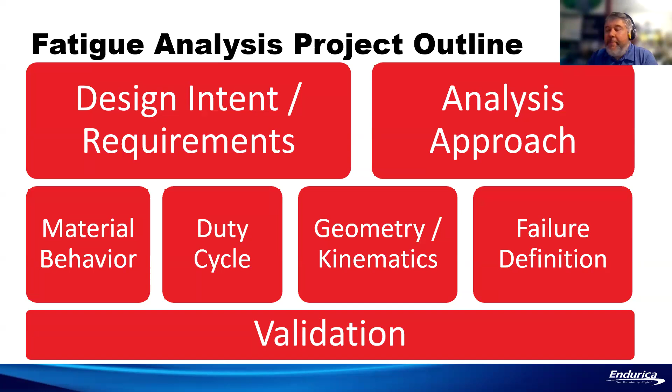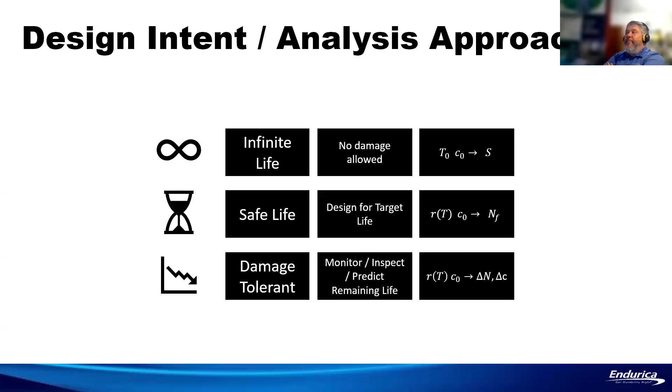All right, so let's talk about some broad categories of fatigue analysis, and the Endurica toolset supports all of these. These are ordered from, let's say, the easiest and least expensive, least time consuming to the more sophisticated analysis. So the three categories are infinite life, safe life, and damage tolerant analysis. And now in the infinite life approach, what we do is we say, when I design this part, we're going to select our loads or our properties or our part dimensions such that damage will not be allowed to occur.

Just like metals, rubber does have a fatigue limit, and if you stay below that limit, then in a limited sense you can predict indefinite life, right? So the idea in infinite life analysis is you're just checking, let's say for your worst load case, are you above or below the fatigue limit? And when you use the infinite life approach, you can calculate what I've called S here, the safety factor, and that just represents the margin by which you are clear of the fatigue limit, right? If you're right on the fatigue limit, then the safety factor is 1. But if you're below the fatigue limit by 2, then your safety factor is 2. Okay, so that's the infinite life approach.

The next category is safe life, and in the safe life approach, your customer gives you a target life, right? An automaker might say, well, you have to have a 100,000 kilometer warranty for the car or something like that, and so you're given a life target. Now this requires a bit more testing because you have to characterize the rate at which damage develops as a function of your input loads. But once we make that characterization, then we can calculate life and we can check whether we're above or below the limit. That's the safe life approach.

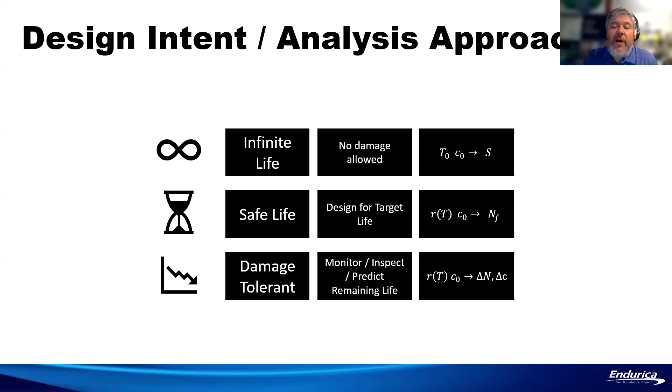So Endurica has tools for all these, and we're going to talk through those today. Now, I mentioned that when you do fatigue analysis, one of the very first things you need to think about is materials testing. Of course, Endurica does have a materials database, but in general, to get the best results, you're probably going to want to test your rubber material. At least, well, like I say, again, it's a question of scope.

So, if this is a context where you don't have the luxury of testing, you can use the Endurica materials database that's included with the software, and that's maybe the cheapest option. But our materials testing framework is scalable, and you can bring in as many of these various effects as you need to capture as much accuracy as you can within your time and engineering budget.

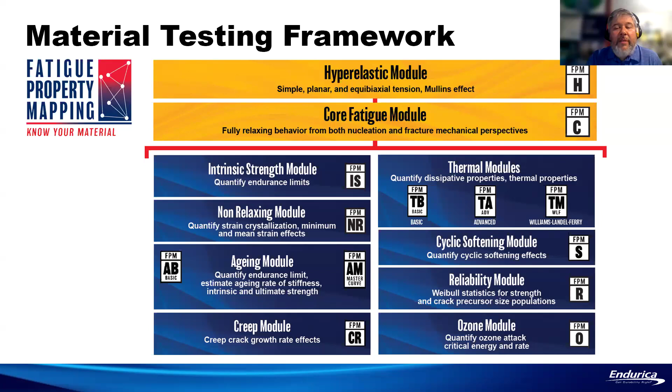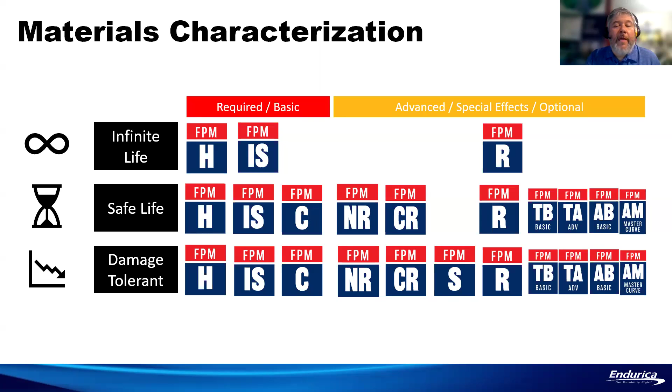Now, when you use Endurica, there are three tools that we talk about. One is Endurica CL, and we have Endurica DT, and we have Endurica EIE. They're really divided by the kind of workflow that they support. So with Endurica CL, it's a post-process only workflow where you run your finite element model, you run Endurica CL as a post-process on the stress strain results from the finite element model, and then it outputs either safety factor or fatigue life. So the key thing there is it's a single duty cycle, and you're talking about repeats or safety factor.

And so you can see this maps onto the first two categories, right? This maps onto infinite life or safe life analysis. Endurica DT is our incremental solver. With Endurica DT, you can specify block cycle schedules. You can do co-simulation. With DT, it's not necessarily purely a post-process. You can couple the Endurica solver with your finite element solver. And for example, if you have cyclic softening, you can update the stiffness with cycles, like if you have a stiffness loss type of failure mode.

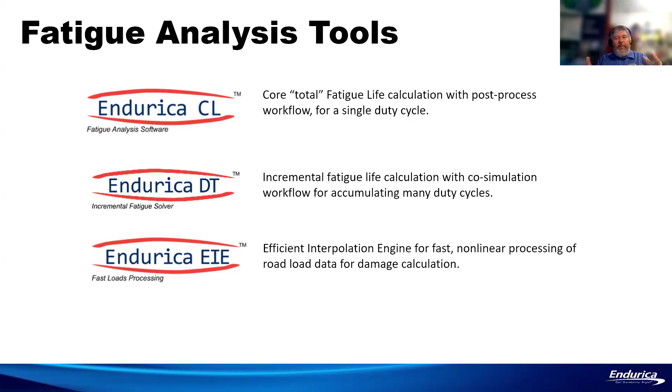In many cases, the histories that you want to analyze are lengthier than you can really analyze directly with a finite element simulation. And so Endurica EIE provides a method whereby you can rapidly convert XYZ global force or displacement inputs into stress strain history on each element in a model without having to do the full-blown FEA. It's very fast. It's like 10,000 times faster than trying to directly do it. So it opens up a lot of analysis possibilities that are important.

All right. So now what I want to do is just go through some examples to make all these ideas concrete. And you can see that as we're going through these examples, we're scaling up both the materials testing and the analysis requirements. So the first example that we're going to do is just an infinite life analysis. Again, the right context for this is when you have maybe a very tight deadline or a very small budget to work with. This is just a way of checking, is it above or below the fatigue limit? If it's below the fatigue limit, then you've got a reason to say that you've satisfied the design requirement.

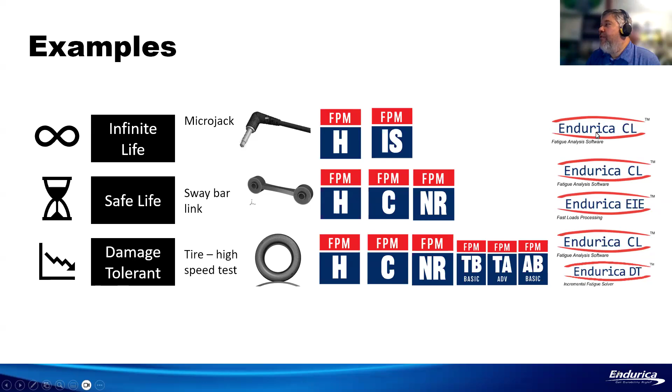So Microjack is one example. We'll also do the example from an automotive suspension, a sway bar link. And then we'll also do a tire example. You can see here that as we go in, the materials characterization gets more and more sophisticated. And you can also see the tools that we're applying in each of these particular examples. So, all right, let's talk about the first example.

If you decrease the tearing energy input, the rate of crack growth gets slower and slower and slower. Eventually, as you reach this limit T naught, the crack growth rate will actually drop to zero. For a natural rubber, for example, T naught has a value of something like maybe 50 joule per meter squared. And if you're below that, then the crack does not have enough energy to break any polymer chains, and so it doesn't grow no matter how many cycles you give it.

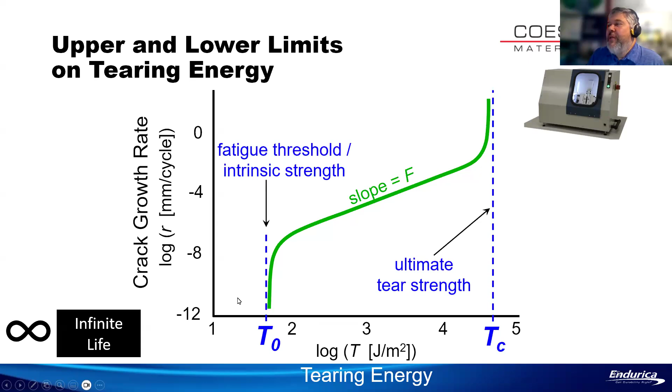This is for an EPDM compound, and we've measured the fatigue threshold at 60 joule per meter squared. We've measured the initial crack size at a tenth of a millimeter. And I should mention, when you're using Endurica, it always assumes that your material contains microscopic cracks. And one of the important inputs for the material characterization is, what is the initial size of those cracks?

We can measure that experimentally, or you can make an assumption about that. Typically, they're in the range from 20 to 100 microns. So you can see in this case, we've used a sort of conservative assumption of a tenth of a millimeter.

But again, very simple characterization, and that's an advantage, because if I just specify my hyperelastic and my intrinsic strength properties, I don't really need to worry about a lot of the other special effects that rubber might exhibit. Temperature and rate dependency, I don't have to think too much about that. Crack growth rate curves, strain crystallization, all of that I can just kind of ignore, because that's not going to come into play in this analysis.

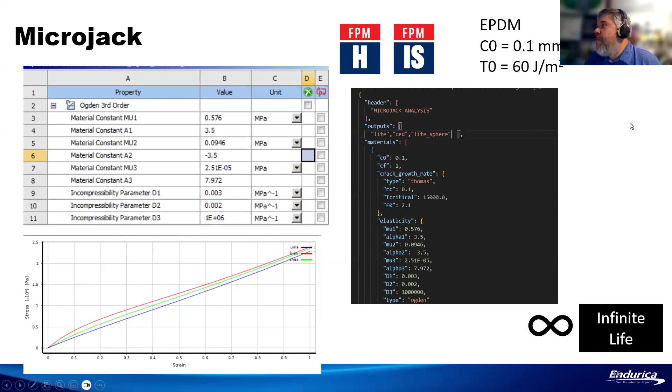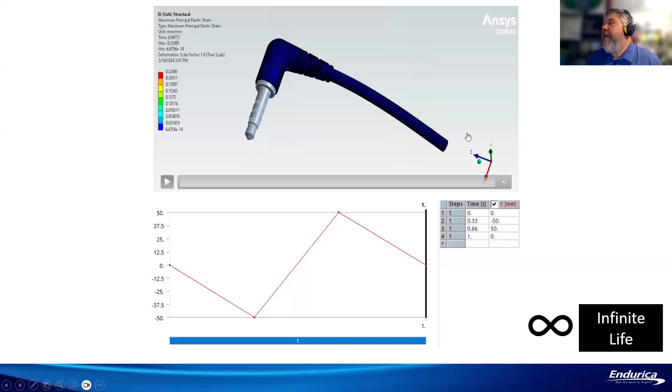So here's an example for this micro jack. We just want to apply this displacement where we're sort of flexing the connector here, and hopefully we want to show that the design is going to have an infinite life capacity. So first you run the simulation in ANSYS,

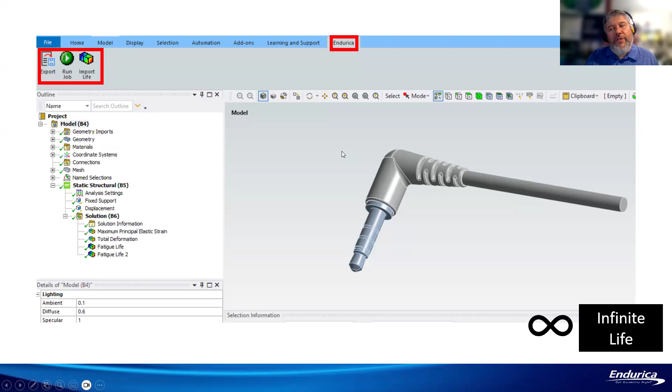and then after you've run and you have the stress strain results for the simulation, when you fire up ANSYS Mechanical, Endurica has a plugin that will give you a couple of new buttons. There's an export button, a button to run the job, and an import life button. So you can just export the strain history results, and then you'll run the job, and then you'll import the results back to ANSYS. So you'll do the visualization inside the ANSYS environment.

When you do the export, you're going to see some forms that look like this. You're going to select the particular elements that you want to analyze. Here we've got some metal elements that we're not going to analyze. We're really interested in the insulating rubber in this analysis. So we just select the rubber. We select all the time steps that we want to include as part of the analysis.

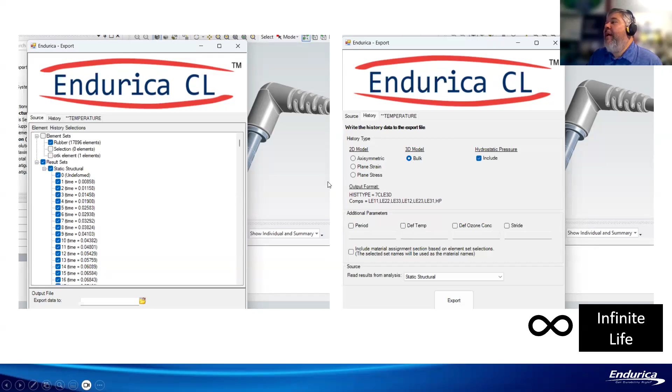We tell Endurica what type of results we're sending it. In this case, we're using bulk 3D with hydrostatic pressure. And then you hit the export button, and you'll be able to send those results out. And then you go ahead and submit the job.

Endurica uses a procedure called critical plane analysis, and critical plane analysis is the idea that your part contains cracks in random orientations, but the orientations that actually develop in service are the ones that minimize the life or minimize the safety factor in this case. So what we do is we calculate this for each point or for each element centroid in your model.

We're going to basically scan through all of the possible orientations that a crack might take, and for each of those orientations, we'll calculate a tearing energy, and then for each of those tearing energies, we'll calculate the safety factor, right? We'll just check, is it bigger or smaller than T naught? And of course, the safety factor that we report back to you is the smallest value across all possible orientations.

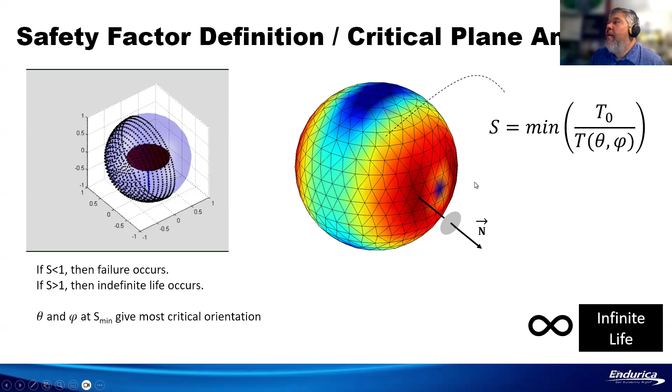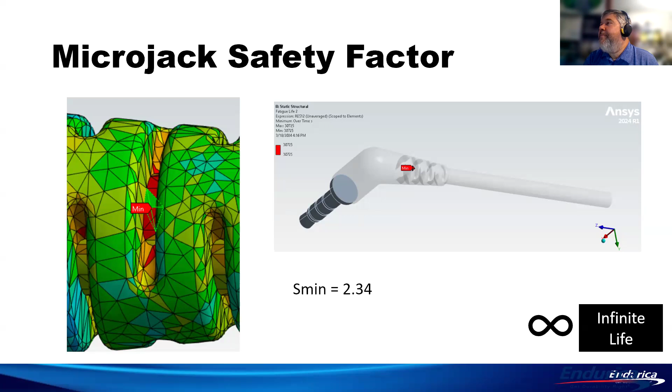So here's kind of a summary. You can use infinite life design to screen materials and concepts. It's very fast. It'll give you some insight into the basic failure mechanics, right? It'll show you where it'll fail. It'll show you the orientation of the critical plane. It sort of airbrushes away all of the special effects, so you don't have to worry about getting lost in a lot of complexity. So simple and fast. Obviously it does not consider aging, does not consider other special effects, does not give you any life if your safety factor is less than 1.

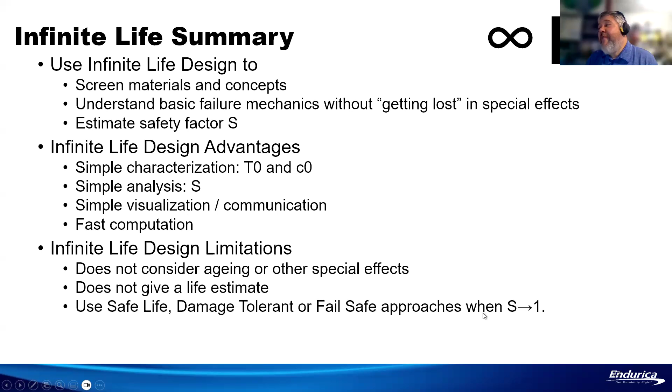So if your safety factor is less than 1, then you either need to redesign your part or move on to the next category of analysis, which is safe life. So for the safe life, I'm going to illustrate this analysis with a sway bar link. This is part of an automotive suspension. It's loaded axially in the X direction.

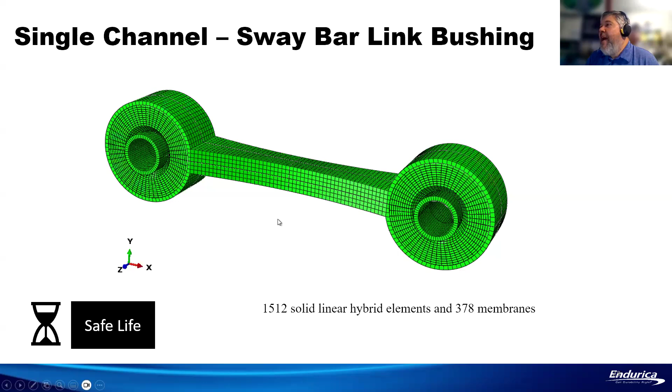And now here the materials characterization gets a little bit more sophisticated. So we're going to do the hyperelastic, the core, and now we need to characterize the mean strain effects with the non-relaxing module. So the materials characterization is going to look something like this. We're going to have stress strain curves just like we had before. We're going to have a crack growth rate curve; before, all we needed was the fatigue limit. Now we need the full crack growth rate curve.

And we also need the strain life curve so that we can use these two results to calibrate the crack precursor size, which for this example turns out to be 12 microns. Once we've defined all these, we can also run the non-relaxing experiments. That allows us to define mean strain effects, and we can plot out, for example, a Haigh diagram for the rubber. You can see here's the Haigh diagram.

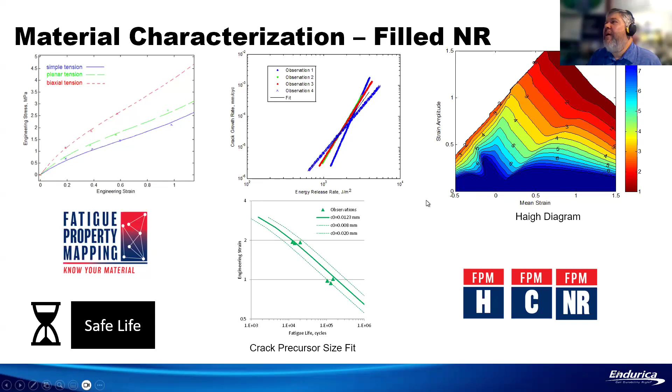So once we have the materials characterization for the safe life approach, then we're going to want to do the fatigue analysis. The history for safe life could be as simple as just a sine wave. It could be as complex as you want. You could have a road load recording, which in this example is what we're going to do, mostly so I can show you what EIE does. So in this example, we're going to have the displacement varying from 0 to 4 millimeters over 1,000 seconds.

And now, of course, it would be very expensive to run a finite element job through this 1,000 seconds of history. Now this is just a displacement in a single direction. But if you look at this, you might say, well, why don't we just model the displacement of the part from 0 to 4 millimeters? And since this is nonlinear, maybe we take 8 steps to do that. And then when I want to know the strain at any of these times, I can take the results from the 8 steps that I computed and just interpolate between the steps. So it's treated as piecewise linear.

So that's what Endurica EIE does. This pre-computed finite element solution, we call the map. So with EIE, you compute a map, and then you can use that to interpolate whatever strain history you've got based on your input displacement history. Now, this example is just one channel of load. EIE can accept maps that have as many as 6 independent input channels. But to keep things simple, we'll just do it on one channel here.

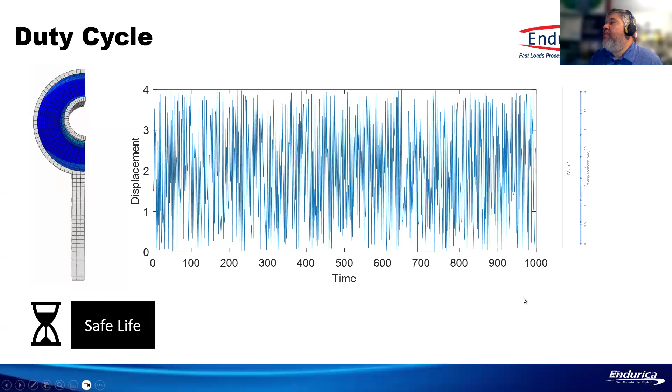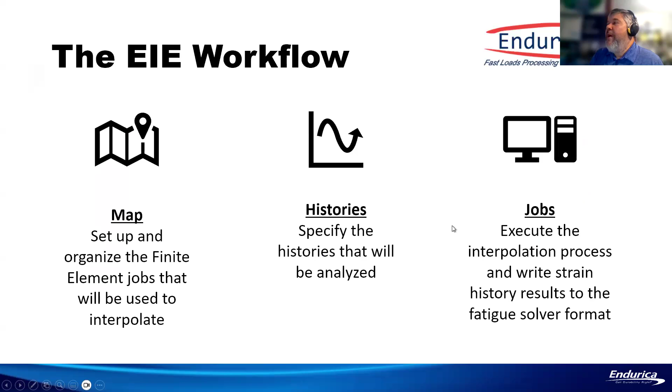And then once EIE interpolates, for each element we will get the full time history of the strain, so that we can pass that to the fatigue calculation and get fatigue results. So here's an example of the EIE workflow. First of all, we need to define the map. In this case, it's very simple. It's just running from 0 to 4 millimeters displacement. Once you set up the map, you run your finite element job. And then you also need to give your history, which is the history of the displacement. And then you're ready to do the interpolation by running the job.

So again, these are the steps for building the map. First of all, you specify how many channels and what each channel means. The channels could be force, they could be displacement. Any variable that you can use as a boundary condition can be an input channel.

Then you define the particular path that your map solution is going to follow in the finite element job. In this case, again, it's trivial. We're just going from 0 to 4 millimeters, but you can imagine if I've got multiple channels, I have to trace out what path my finite element solution is going to follow to build the map. That can be done in one job or a series of jobs, up to you how you want to structure it. But once you've got that defined, then you can run your finite element job by applying those boundary conditions.

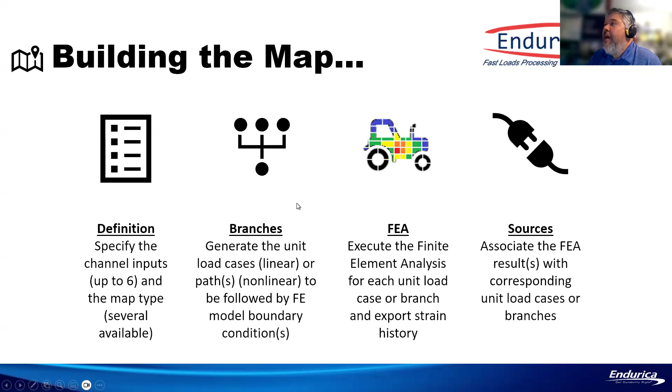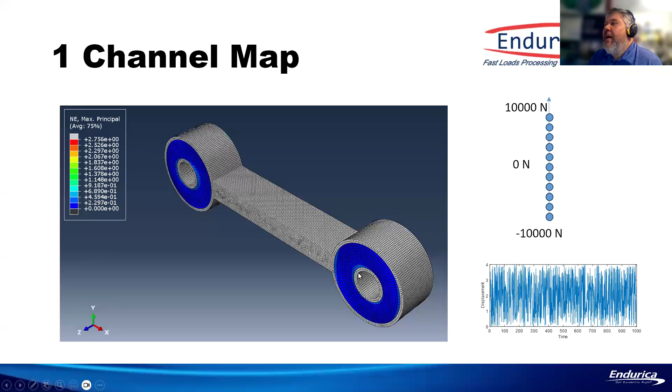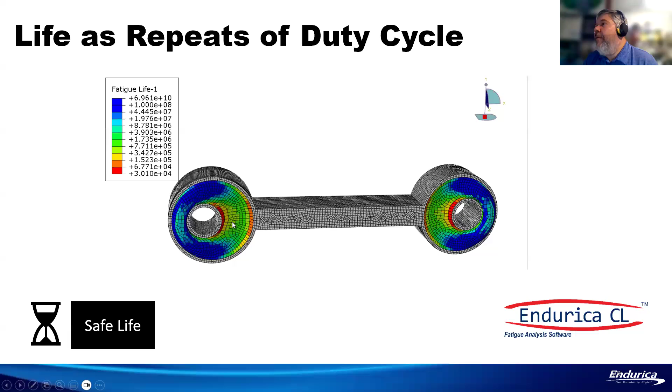And then you basically associate the map with the finite element results databases, and then you're ready to go ahead and run EIE. So in this case, we're going to go ahead and run EIE, and this is what the map job looks like. And then once you've run EIE, then you can pass that into Endurica CL. Endurica CL will compute the repeats of that 1,000 second history, and it'll report. So here, the red corresponds to 30,000 repeats of that 1,000 second snippet of history, and so here's your prediction of the life and the failure mode. And that's an example of safe life analysis.

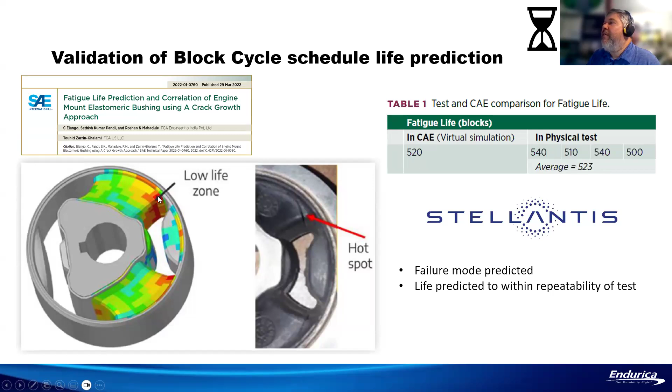All right. So again, you could use safe life to justify, if you've got a spec on what the load case is and a spec on how much life you need to get, this procedure allows you to do that. The materials characterization is a little bit more involved than the infinite life, right? You have to get the crack growth rate curve. Maybe you have to start thinking about some of the special effects in rubber. But it does allow you to compare A to B on lives longer, lives less long. Gives you very detailed knowledge of damage mechanisms, and flexible, scalable, accurate, and so on.

Now, the only trouble with this is that, again, you've assumed that you've got one load case that just repeats on and on until end of life. And real life is not really that simple. Another limitation of the safe life analysis is, since it's post-process only, if the material properties of the rubber evolve with cycles or with time, the safe life approach can't do anything with that. So if you want to take that into account, you're going to have to go a step deeper to the damage tolerant approach, and use some of the co-simulation capabilities.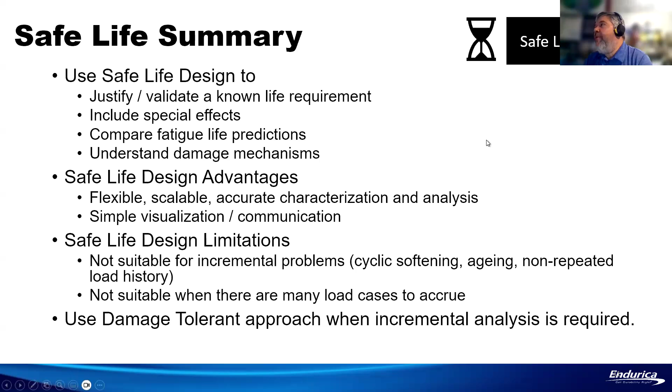So to illustrate the damage tolerant approach, I'm going to use the example of a tire. In the tire industry, there's a government test where they assign a speed rating to the tire. The way that works is there's a test that has 13 steps in it. Each row in this table is one of the steps in the test. In the first 4 steps, they run at 85% of the rated load of the tire, and they start at 80 kilometers an hour. They do that for 2 hours. Then they bump up the speed to 140 kilometers an hour for half an hour. In each step, they're increasing the speed on the tire. At the end of step 4, you've accumulated 3.5 hours of tire operation at various speeds.

And now if the test passes this, it's legal to sell the tire. But this does not get you a speed rating. To get a speed rating, you've got to now put the load at 100% of rated load and then keep ramping up the speed. They run these in steps of 10 minutes. So they'll run the speed for 10 minutes. If the tire hasn't failed, they bump it up to this one.

If the tire hasn't failed, they bump it up to this one. And they just keep going. The test spec goes all the way up to 300 kilometers an hour, which is kind of crazy. But if you're racing, you probably want to make sure your tires will do that. So anyhow, this is the test spec, and basically the speed rating that your tire earns is the last step that you pass in the test.

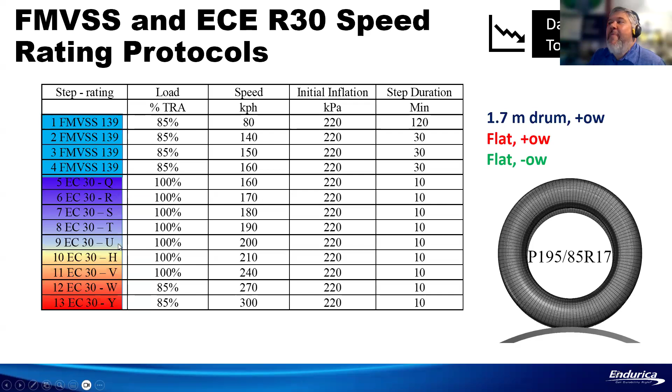So in this example of the damage tolerant procedure, what we do is we model each of the test steps individually, right? So this is 13 different load cases, basically the tire running at speeds ranging from 80 kilometers an hour to 300 kilometers an hour. The different loads are applied here, right? The first 4 steps are 85% load, and the rest are at 100% load.

And here I'm just showing the out of plane displacement of the tire so that you can see up until about 200 kilometers an hour, the solution is pretty, let's say, tame. If you look at the colors in the sidewall, you can see as we increase the speed, you're starting to get a little bit more displacement, right, because of the growth of the tire with the centrifugal force.

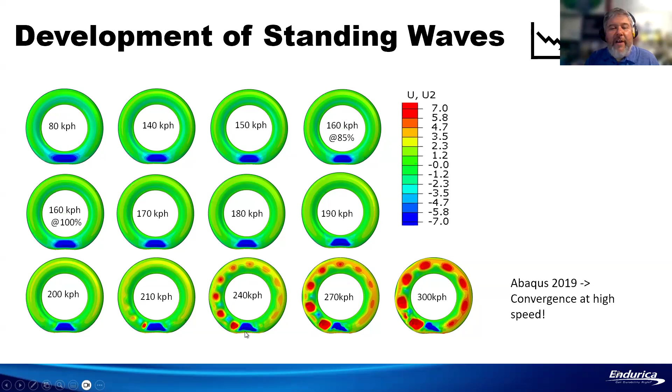However, once you hit a critical speed, the tire starts to develop a standing wave. And this is very damaging to the tire because below this speed, you have 1 fatigue cycle per rev of the tire. But as soon as you hit this speed, now you have 10 cycles per rev of the tire. And so again, that becomes very damaging.

So in these types of problems, it's often very important to look at the thermal effects, right? If we're thinking how temperature influences things, then we need to calculate self-heating, which we can do. This is just showing temperatures in the simulation as a function of the test step. You can see that in the first 9 steps, increasing the speed does increase the temperature, but once you hit the standing wave, the temperature just shoots way up.

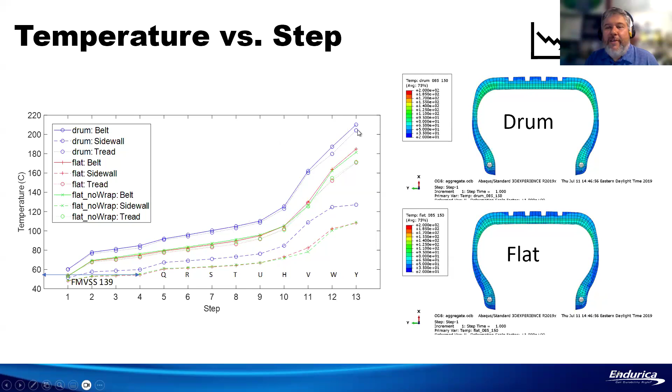Now, of course, when you're just running the structural and the thermal finite element models, we haven't calculated damage yet, so we can calculate a notional stress strain field, a notional temperature field. A tire is never going to reach 200 degrees Celsius because the rubber is going to catch on fire and burn before it hits 200. But if you ignore the fact that material can fail, then the stress strain and temperature fields will give you this information. And now we need to use the damage tolerant approach to accumulate the damage and find out in which of these steps the conditions are so severe that the tire is done.

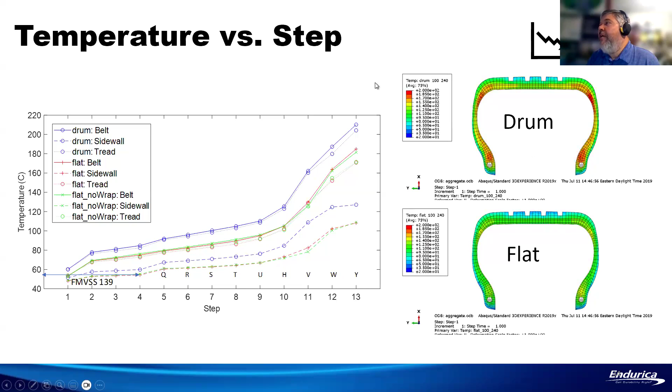So now, of course, when you're doing this type of simulation, not only do you need the hyperelastic, the crack growth curve, the crystallization behavior, but now we also need to think about how does the crack growth rate curve depend on temperature? How does the tire age? How does the tire respond with aging of the material? And we have tests for characterizing all of those things.

This is just a plot that shows the dependence of the tear strength of the rubber on temperature up to 200 C for the belt, the sidewall, and the tread of the tire. And you can see that there's some rankings. Some of the rubbers are more sensitive to temperature, some of them are less sensitive. And so that's an important part of this calculation that involves very high operating temperatures.

And then in the damage tolerant approach, we're computing residual life as a function of time through the 13 steps of the test. And what residual life means is we've got a load case that we can use to measure the life of the tire. So in this case, we've just taken the very first step of the test and we've said, if I took that first step of the test and ran it out till end of life, that's my measure of residual life.

So at time zero, before there's any history accumulated, there's a residual life on the tire, let's say 2.5 times 10 to the 7 revolutions of the tire. Now, after the first load step of the test, if I accumulate those cycles and temperature field, you can see that the residual life does not change very much in the first 2 hours of the test.

And then as I keep accumulating, you can see I get to the Q step, the R, the S, the T. You start to see a little bit of just a slight decrement of the residual life until we pass step H, and then we go into step V, and you can see that at step V, the tire loses integrity, and we've got failure. This is actually a case where we looked at 3 different analysis cases, and you can see we had different speed ratings on these tires.

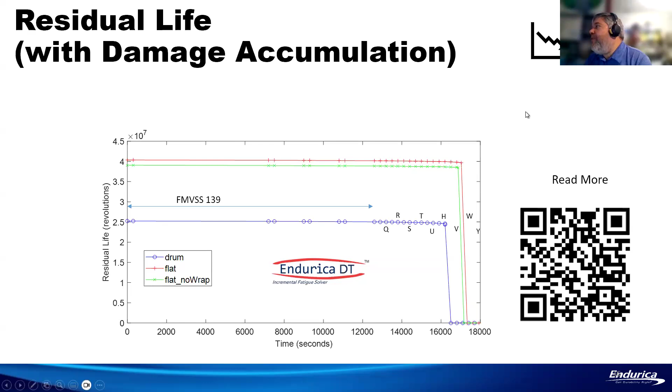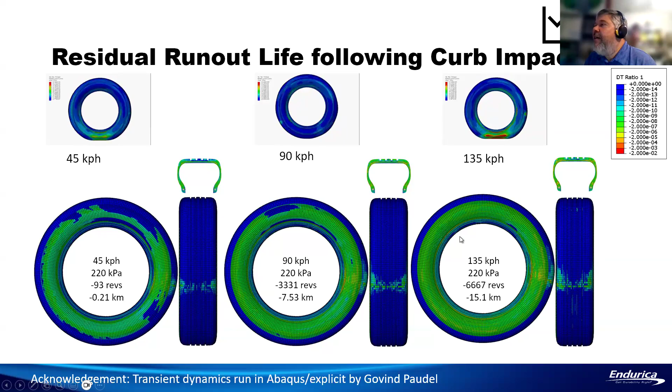And what you're looking at in these contour plots is the percentage change in the residual life relative to the case where you don't have the impact. And you can see that when you do the impact, it produces a bruise on the tire. And you can see where most of the damage in the tire is happening. If you peel this away, you find out that this does some damage to the belt structure of the tire. So yeah. All right. So those are some examples of damage tolerant analysis.

If you've got multiple load cases like block cycles or multi-step tests, if you've got aging or cyclic softening, right, that causes material evolution. And anything that is an incremental type of workflow or a co-simulation, that's when you would use damage tolerant. We recently published a paper on modeling the effects of oxidation on fatigue, and that's another example where we would use this incremental workflow because the material properties are changing with time.

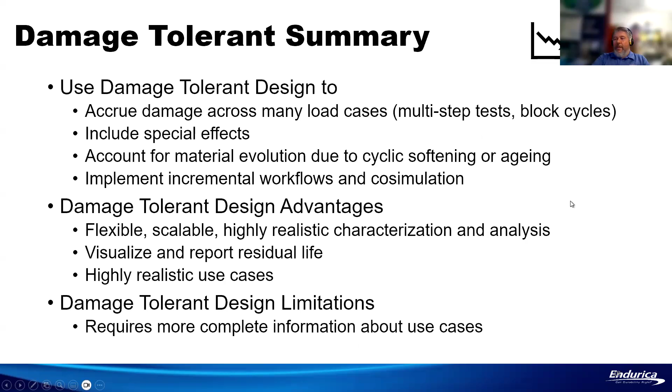So obviously you can be very highly realistic in terms of material properties and in terms of your duty cycle. And the only limitation really is just that you've got to specify things more completely, and there's some more work for the analyst to do around tying everything together to build the workflow. So I'm going to stop there. I think there's time for questions.

Yeah, sometimes when I talk to people and we show them our tool sets, not all the time, but sometimes people will say, "Oh, that sounds really expensive," or "Oh, there's no way you can possibly be accurate enough to predict rubber fatigue," or "That's too hard." And hopefully you come away from today and say, "No, there's tools for that, right?" And part of the trick is choosing the right tool for the job. You don't want to use a screwdriver where a hammer is needed, or vice versa.

But if you're mindful about what your time limits and your budget limits are, you can choose an appropriate analysis. And the Endurica tool set is very scalable that way. It'll give you what you can do to get durability right. One of our mottos is accurate, complete, and scalable. So we give you the material models you need to be accurate. We give you all the workflows you need to have a complete tool set. We're scalable so that you can go from small problems to big problems, and just get the job done that needs doing.